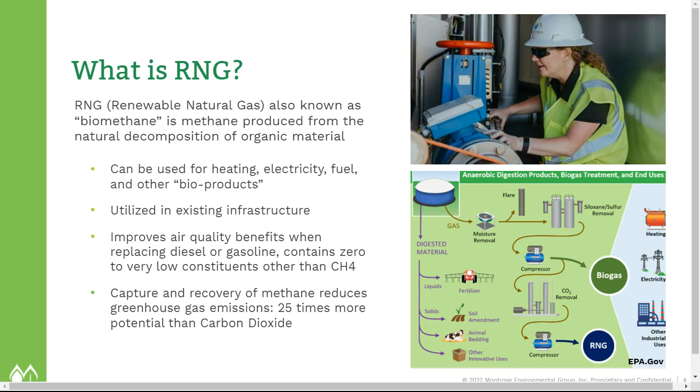Ultimately, where we came in and developed the solution you see here, the farm had specific manure handling techniques that flushed manure into settling lagoons, and this process heavily reduced their emissions and their water demands, and they land apply the water from this process as well. So it's not only producing great energy, but also reduces water treatment costs as well.

And Montrose provided this solution, so engineering, procurement, construction management, commissioning, startup, for around 7,800 cows. And I believe this offsets about 10,000 vehicles on gasoline every year at its capacity. So here's the overall process.

We have a vacuum system that collects manure from the facility. It's then transferred into a receiving pit and pumped into 3 digesters. These digesters are stainless steel on concrete foundations. They have an interior membrane for the production of gas, biogas, into a vapor space, and the digestate, or the material that's not converted, is then pressed, and like I mentioned, the water is then sent to a covered lagoon for land application.

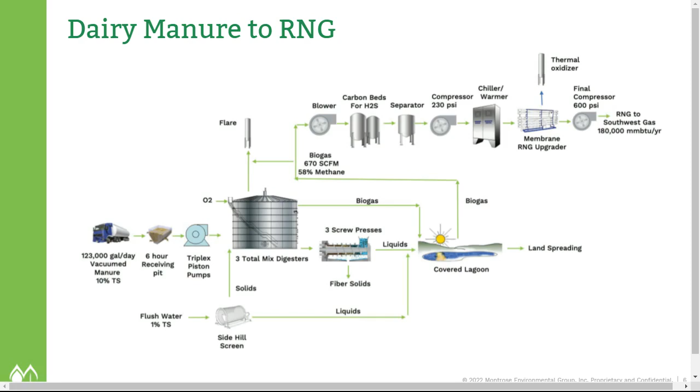A really great thing about this process is the ability to normalize operations across long periods of time. So this lagoon acts as two major components. One, it produces additional gas from the water, volatile solids in the water that are soluble. It also helps treat the water anaerobically into water that can be discharged, and it also allows for buffering of gas upgrading.

So the slower reactions on the front end of the process and digestion go into this lagoon. That's an HDPE cover that'll elevate in the wind, and feeding into gas upgrading allows for very steady operation, very limited downtime, and no flaring. So if there's any upset on either side of the process, this lagoon acts as a buffer.

So what I can say to minimum head size requirements. So if we look at this dairy, and I said roughly 7,800 equivalents.

The dynamics around, there's a couple things that make a huge difference here: existing manure handling practices and dairy operations drive the carbon intensity measurements and overall capital. So whether a site needs additional capital to improve existing systems, or specialized systems for treatment on the back end, drive the projects here.

If you look publicly at what's been announced on large projects, we're seeing this size and above is very popular, and the viability also depends on a lot of financial things that we're not necessarily involved with, whether it's debt or guaranteed return rates over time. But ultimately, Montrose is focused on doing these projects well, which is going to be the biggest driver for more opportunities in the future.

Another question from Ed: is biogas combined heat and power more profitable than biogas to renewable natural gas? This question on combusting biogas for heat or power versus conversion to RNG is primarily driven off of renewable energy credits, both federal and state-driven programs. So we see a lot of conversion of CHP systems into gas upgrading systems for use in vehicle fuels and pipeline natural gas. Profitability depends mostly on the value of those credits.

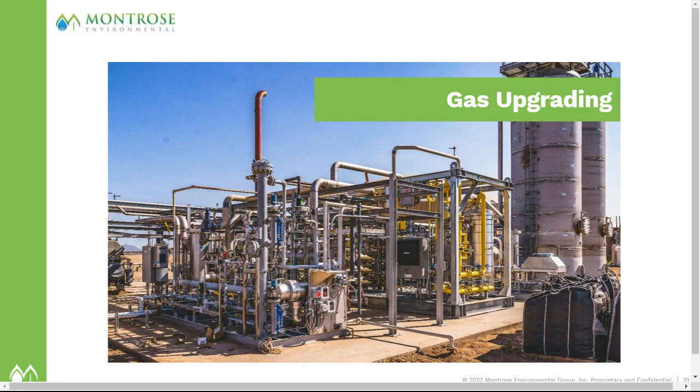So supply chain inside the dairy is critical. So like we provide water to them, they give us the manure, and the bedding goes back. When I say we give, I mean just in the transaction of the material moving the site. But this facility, like I mentioned, Paloma Dairy, you can Google and see their full operation out in the space here. So great facility actually, and really happy to have this facility as part of our experience.

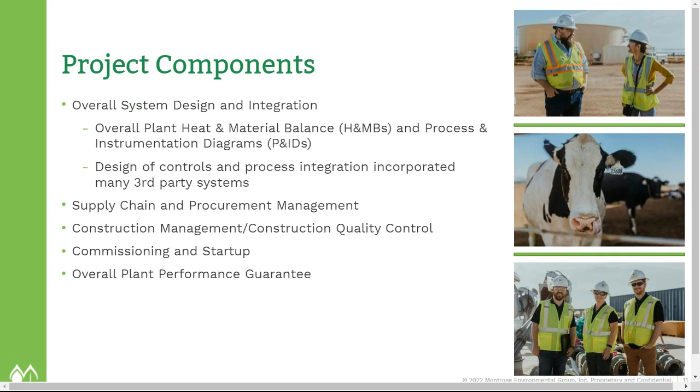So if I really talk about why Montrose in the context of these types of projects, it's because renewable natural gas actually hits on all 3 of these. The air, the water, and the soil are all impacted by renewable natural gas in these solutions. And so it's a great opportunity. And the overall scale of applications for organic waste into energy in the United States is massive.

So if anyone has interest in figuring out how to make this happen, I highly suggest looking at renewable natural gas as a true solution and a practical solution for our future state of energy usage in this country and worldwide. So we just want to continue to do projects well and keep people safe and protect the environment. So that's why we're doing this. Which is all fantastic. And I can definitely hear the passion in your voice when you talk about RNG and everything that you guys are doing at Montrose.